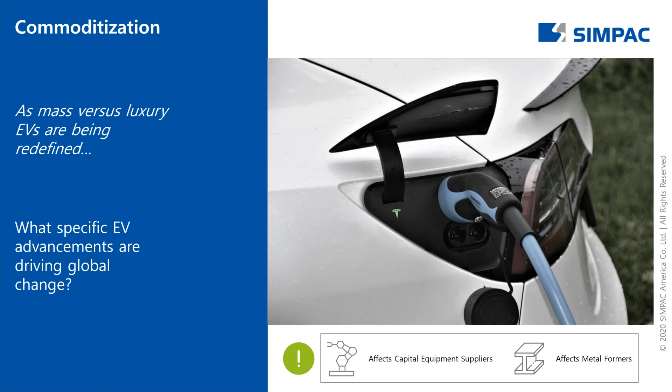Two examples are GM and Toyota. GM currently has an EV Bolt with an MSRP of a shade over $37,000. Toyota, while not a complete EV vehicle, has a gas-electric hybrid called the Prius, which runs around $28,000 to $34,000. I use the example of Toyota because my cousin, who lives in Arizona, owns a Prius, and he told me he's already driven over 300,000 miles on it, only putting gas in about every 3 to 4 months.

Some of them, for example, are BMW, Volvo, Toyota, Hyundai, Kia, GAC Motors, and Daimler. And yes, I'm missing a whole bunch of other ones.

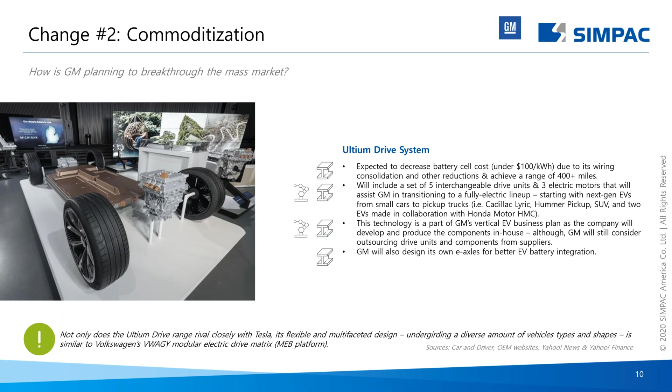GM. We have discussed the Ultium drive system in our first webinar, and we're talking about it again, as this has the potential to be a huge game changer in the EV field. Whether it's by making the technology themselves or collaborating with certain key competitors, GM has shown that they are uniquely positioned for the EV wave to come. With that said, GM has gone so far as to state that they plan on having a global market share of 7.3% of the EV market by 2027. And when you look at how many companies are out there with new EV vehicle launches, that alone is a massive statement.

Last, but certainly not least, we come to Ford. Over the last 5 days, there's been a lot of talk about Ford and its EV plans in the news, from potentially making their own in-house battery to certain potential mergers and acquisitions. Ford is definitely not sitting idle. With a forecast plan of 5.7% of the global EV market by 2027, Ford is definitely making its presence known in the EV field. The F-150 and Mustang Mach-E are two stunning products coming to market, and we have no doubt there will be more to follow. Of course, one of the biggest current challenges I personally see that Ford is going to have is their battery life and time between charges. But we believe this will also be solved shortly as well.

So the next point we'd like to talk about is production ramp-ups, where we discuss SIMPAC and their press technologies related to the EV market. This section is important to me, and hopefully to the metal forming industry as well, as we discuss how the stamping market will change over the next 5 to 10 years because of the changes happening to the EV market.

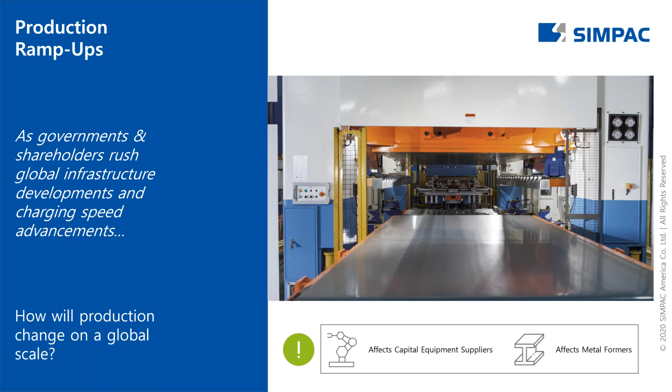Before we start talking about the production ramp-ups that are and will be happening everywhere, I'd like to take a minute and recognize our partners at D&S, located in Hastings, Michigan. Mike Stout, president of D&S, was nice enough to give us a quote as to what he sees in the market when it comes to the future needs of the stamping industry, not only for the EV market but for the overall market as a whole, especially when it comes to stamping of higher strength materials and/or aluminum. I'm going to take a small break here so you can read Mike's quote.

Also, one thing to note: in a couple slides here we're going to talk about larger presses and press lines. Due to space constraints, one of the larger presses we're talking about is SIMPAC's next generation SV4P2000 servo press, which you see pictured right next to Mike Stout's bio.

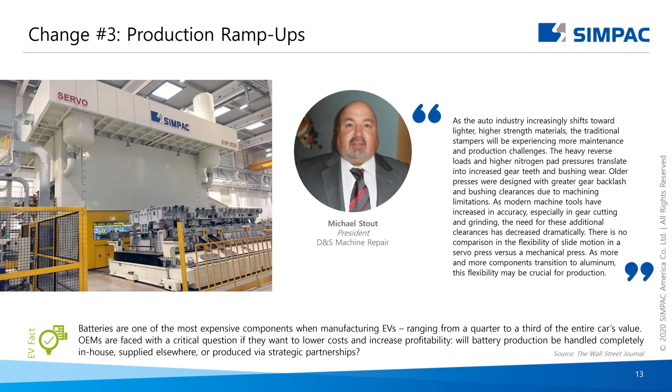But since then, we've had multiple non-American stamping companies purchase these lines for delivery into the North American market. Due to NDAs in place, we're not at liberty to discuss who has purchased these lines or how many have been purchased by whom. But we are able to say that since our first webinar, the number purchased for the North American market has been considerably larger than anticipated or expected. The standard line mix we're seeing ranges from 300 to 500 tons for a press line.

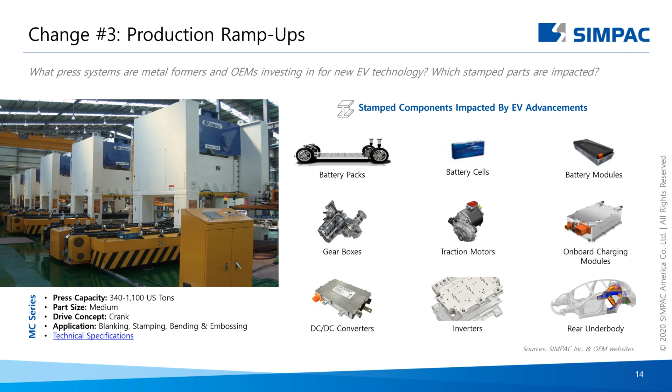Now, if you look at the parts shown as an example on this page, many of these parts fall away when you talk about the Tesla plant. However, many companies are using a different, hybrid model by stamping higher and higher strength materials and/or aluminum. As such, higher tonnage presses, either as a standalone press or press line, are going to be needed. This exemplifies the need for either standard mechanical or servo-driven presses to accommodate these existing and/or future needs.

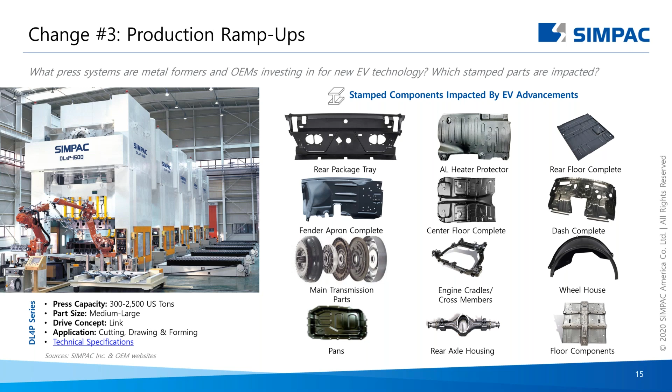Now that we've talked a little bit about what types of presses companies are currently purchasing from SIMPAC for the North American market, we also want to highlight some of the OEMs, either automotive or battery, and what they are doing to be able to ramp up their production in order to meet future demands.

First, let's talk about Tesla. Elon Musk is hoping to eventually produce 20 million vehicles per year globally. In order to do that, he started to work on putting multiple things in place. First and foremost, as we've talked about multiple times throughout the presentation, is the battery. Not only have they been hard at work improving the battery design, but they've also been hard at work expanding battery production capacities worldwide. Whether it's by increasing their supercharger stalls or increasing the production of gigawatt hours, Tesla has driven home the need for improvements in battery availability, life, and chargeability.

Expanding on our first presentation, GM's commitment to invest $20 billion over the next 3 to 5 years in EVs, we can now see where some of this money is actually going. $6.7 billion is going to either upgrading existing brownfields or building greenfields over the next 2 to 3 years. We also have the potential purchase of an 11% or more stake in Nikola. The dollar amount and percentage of ownership is still TBD, and hopefully things will become clearer by the beginning to mid of December.

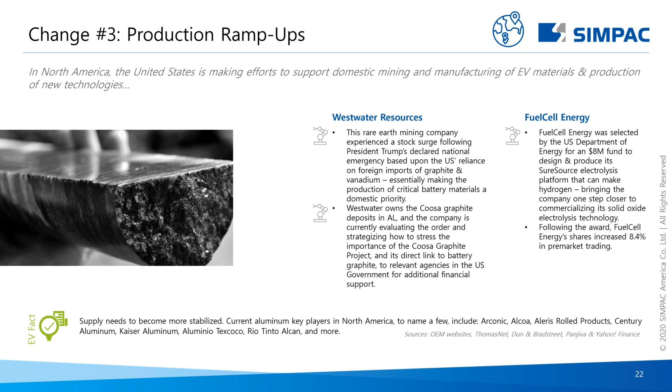Now that we've touched on some of the different types of production ramp-ups we can expect to see in the coming months and years, let's talk a little bit about the sustainability and eco-friendly processes that we can hopefully expect to see with this shift to EV.

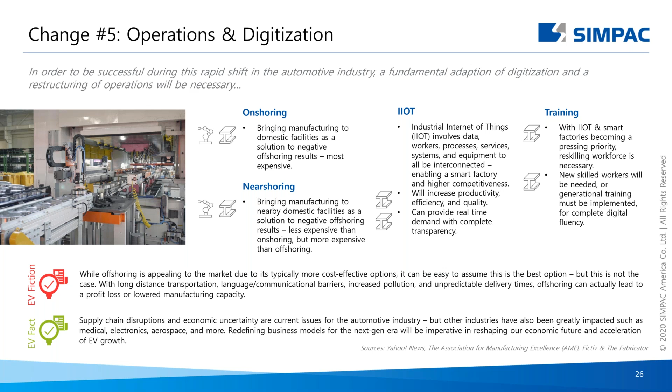Now, to say this was a challenge is definitely an understatement, but we succeeded. And with each new buy-off, we have become more and more efficient.

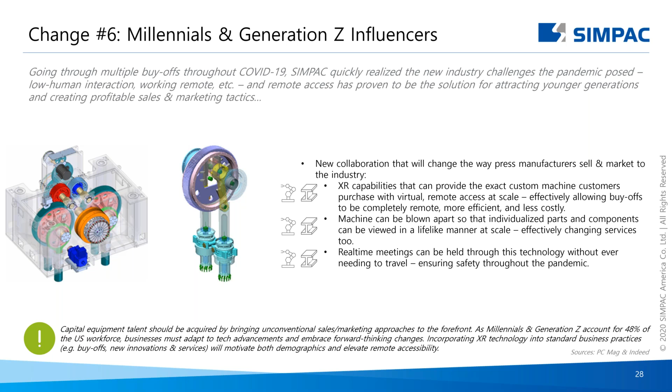This will also provide more safety to our customers during current — by this we mean COVID — and future global disruptions that might happen in our ever-changing world.